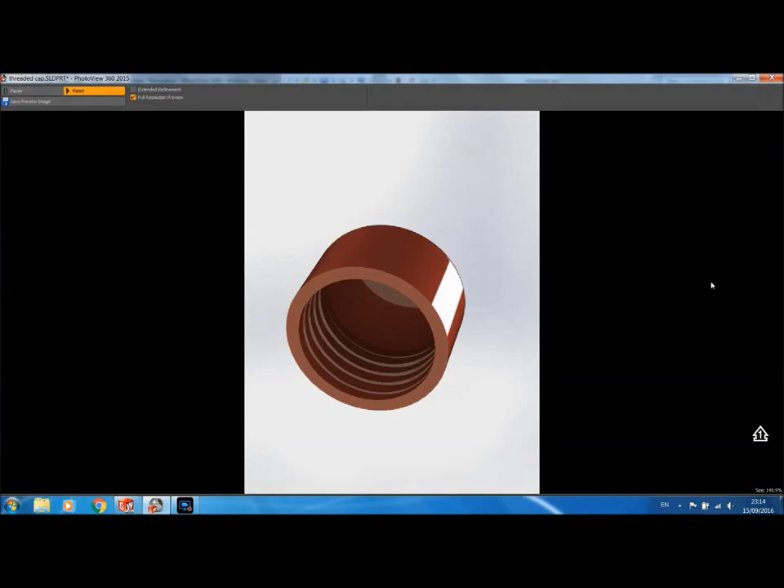Here we have a rendered image of the threaded cap, and the SolidWorks image of the same cap.

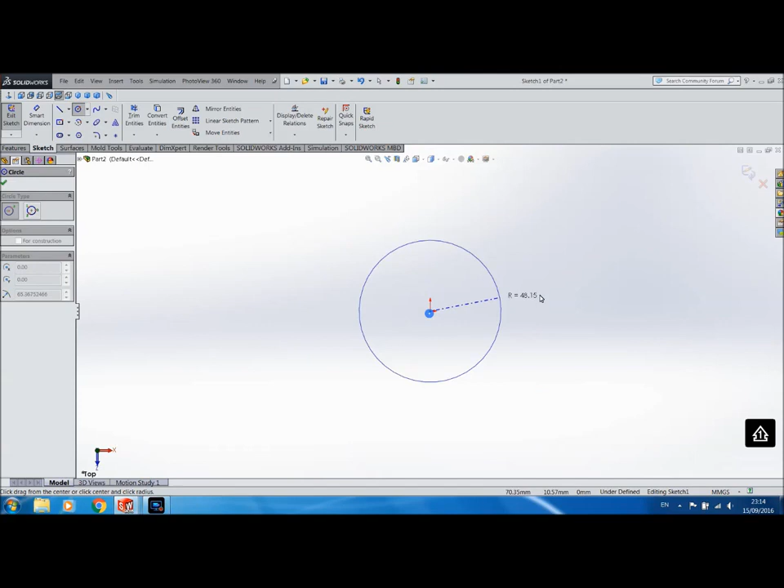We're going to start this from a new drawing. We start by opening a part, and on the top plane we will draw a circle, and we'll make that 38mm in size. This has to be extruded, so exit the sketch, go to your features, extrude, and take it to a height of 24mm.

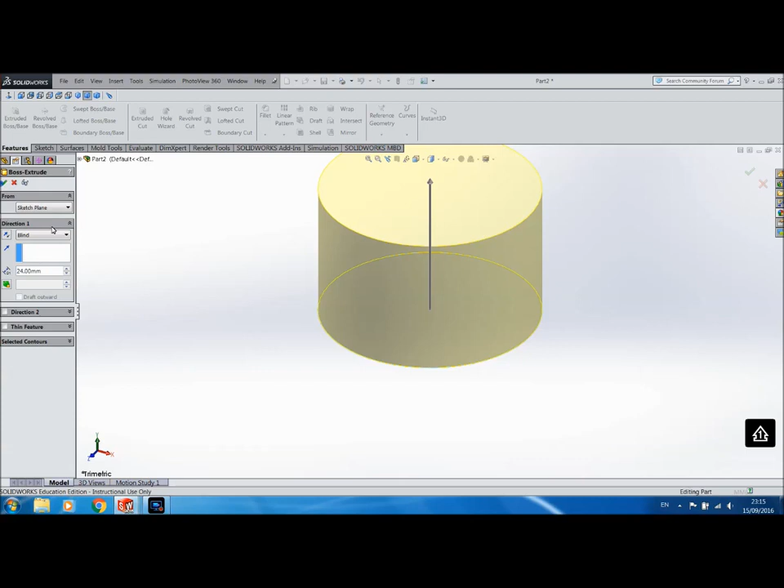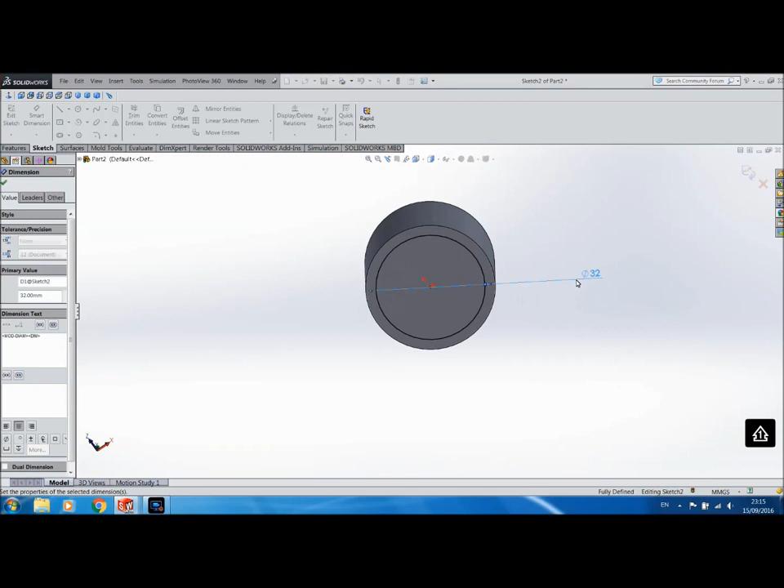I want to draw now in the bottom of this to create the cylinder opening. So we'll go into the sketch on the bottom, draw a circle from the origin, and make this a size of 32mm. We want to cut that, so exit the sketch and go into extrude cut, and take that to a depth of 22mm.

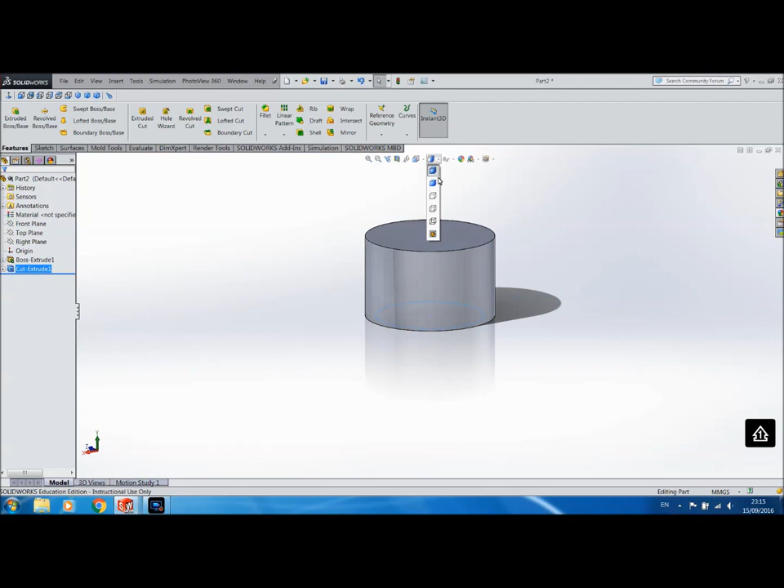So we have the basic opening for the cap, just to show that it's taken out there. We'll change the view of it.

Now we'll do a fillet on the top edge, just round it off, and make the fillet 3mm. Pick the surface or the edge.

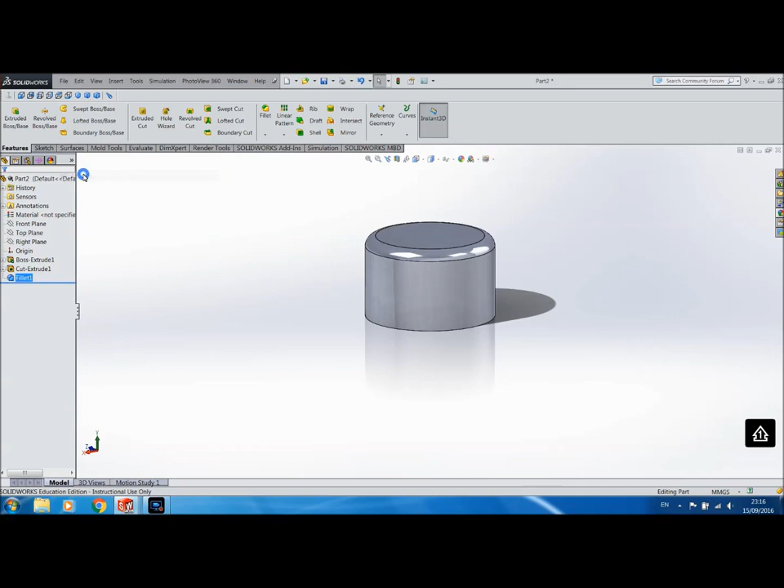Now we want to save this because we haven't got it saved as a part, so we'll put a name on it. We'll call it cap top.

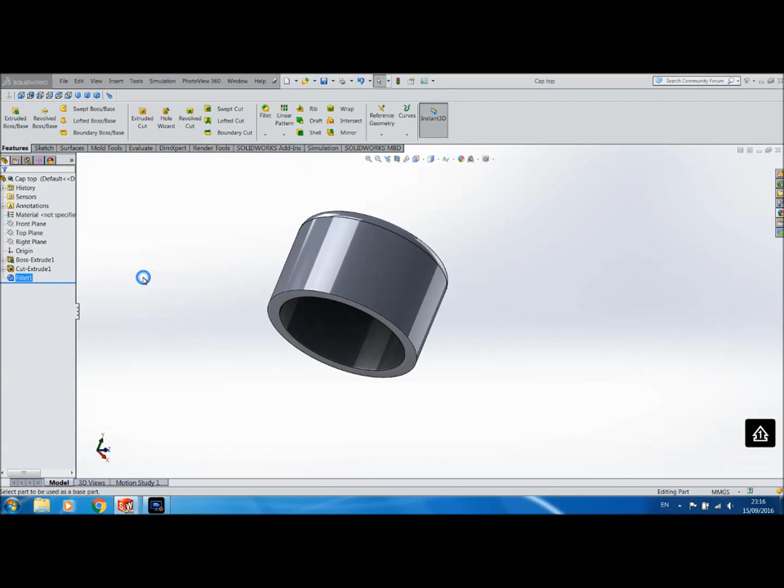Now from the drawing we've created earlier, the threaded cap, we want to insert a part. So we go insert, part, and go threaded cap.

We bring this in. When we bring this in, we want to make sure that the body is covering the threads, and we're going to be mating this as well, so we have to be careful that we leave surfaces available to mate. So we go over here to locate part and mate settings.

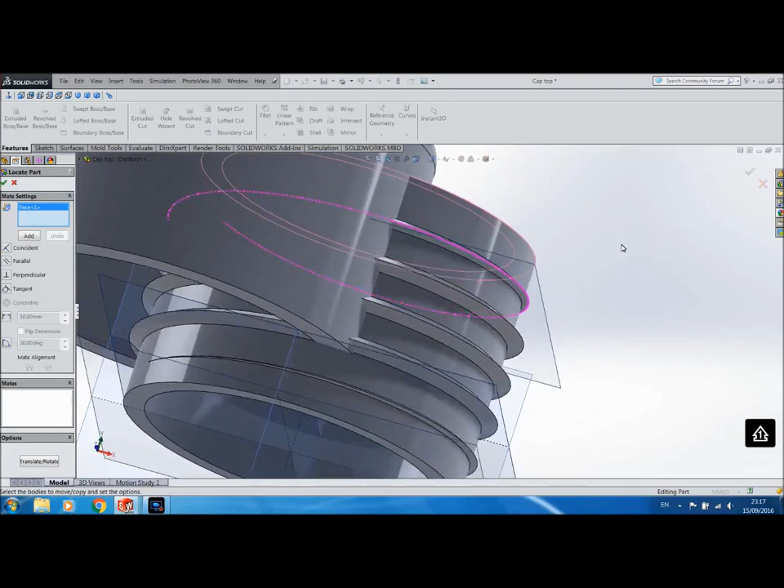I'm picking the top of the cap and the top of the thread, and we're going to mate it to the inside of the top of the cap, and we add that.

Then a second mate that we'll put on this is the cylinder that's threaded, and we will match that to the inside cylinder of the extrude cut.

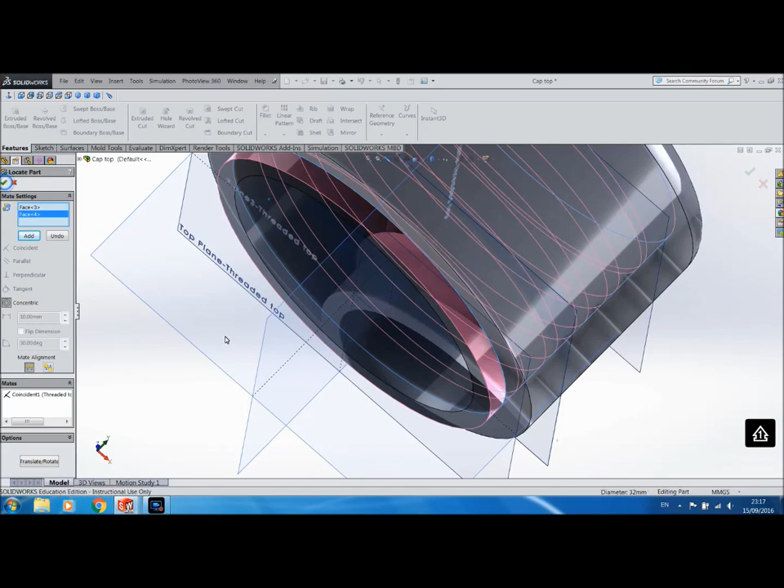And there we go, we have the two of these combined together, but we're not quite finished yet. You can see that the thread is sitting in there nicely in the cap. Now we want to go to our features

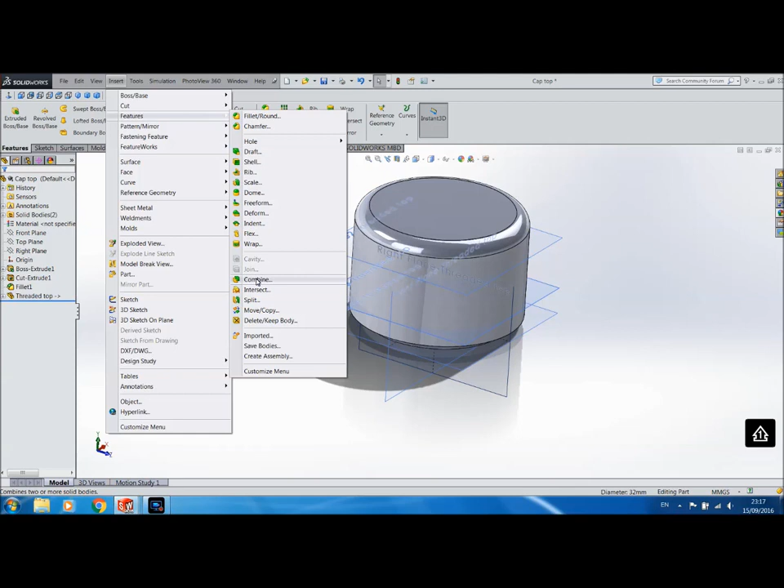and go to combine, and you can see we can add, subtract, and make common here, but we want to subtract the thread.

So we're going to pick the main body, which is our cap, and we want to subtract the thread out of it.

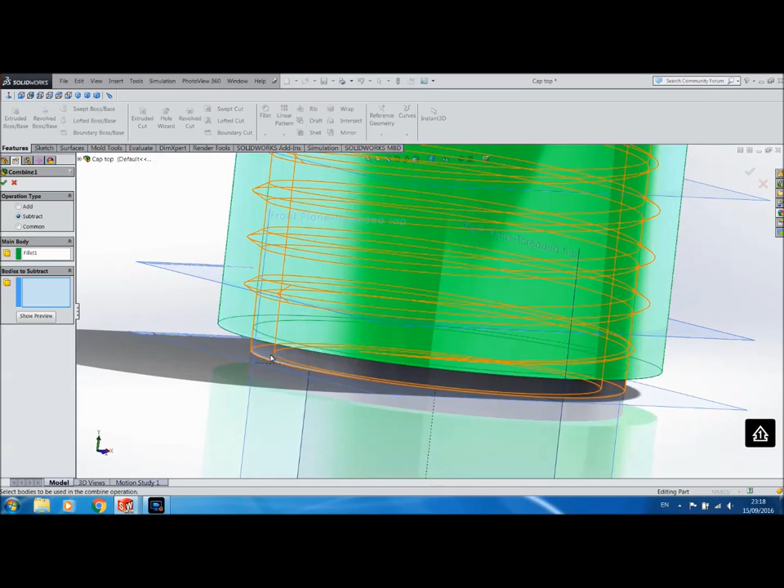It's coming up as fillet there for some particular reason, but it's still going to work. We pick the other solid, which is our threaded top, and we OK that.

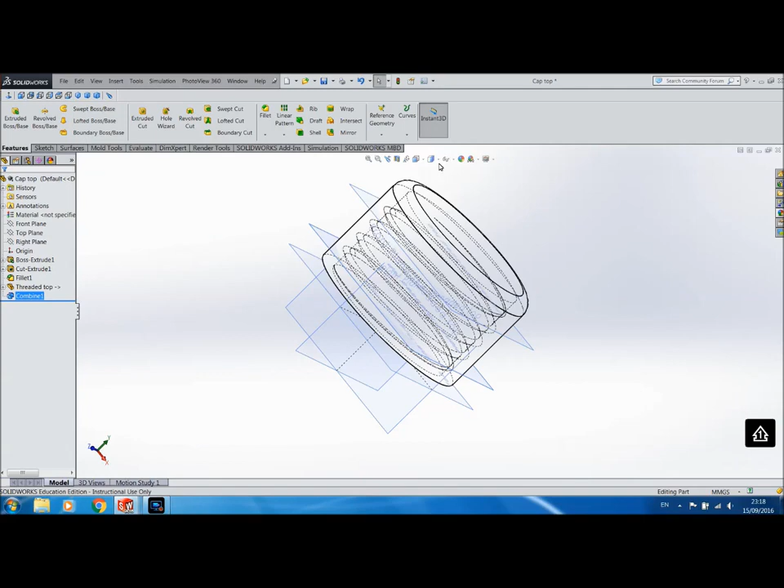If you move around, you can see that we have our thread now matching the threaded top from the other drawing, and we can take a look at that with all its detail. You can see there are quite a few plane references brought in there with the command itself.

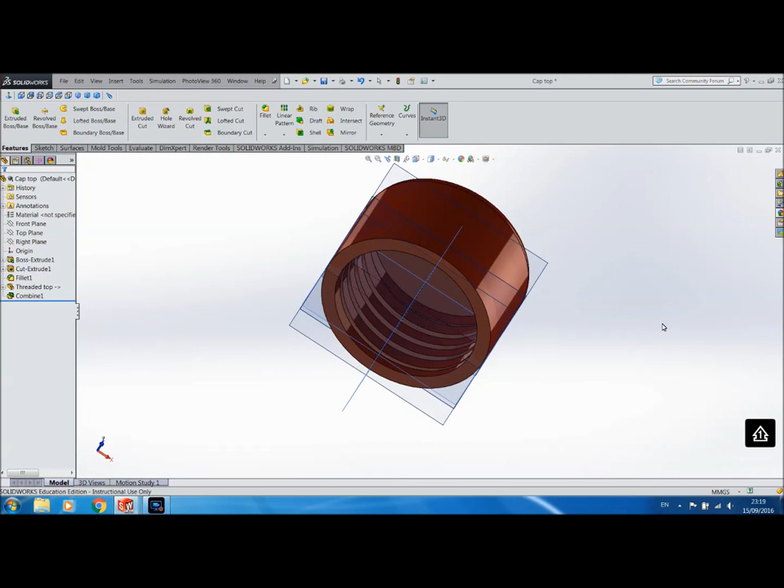And we can render that however we want to, picking a plastic solid here, and we're going to put it to the part so it goes through everything. And render.

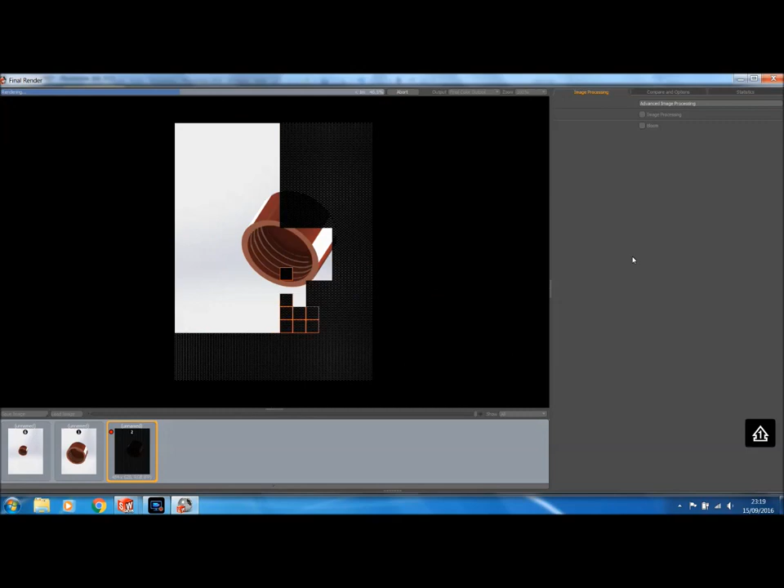You can see it produces quite a satisfactory look of the bottle cap.